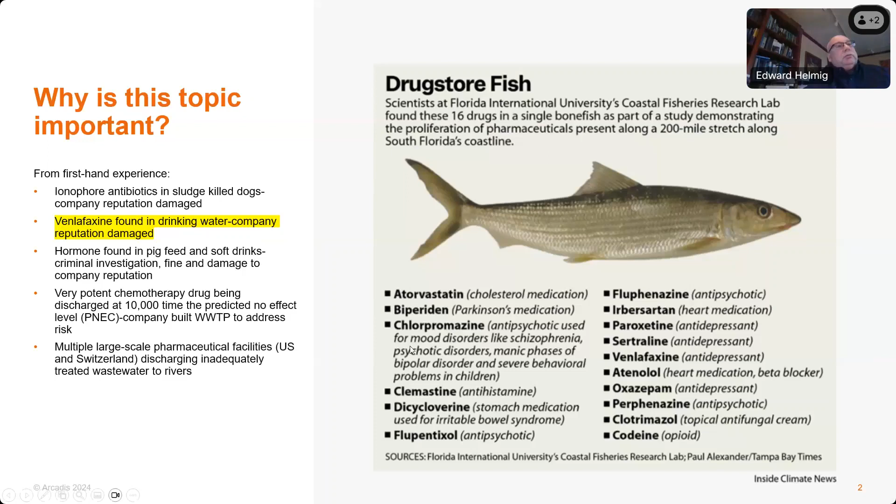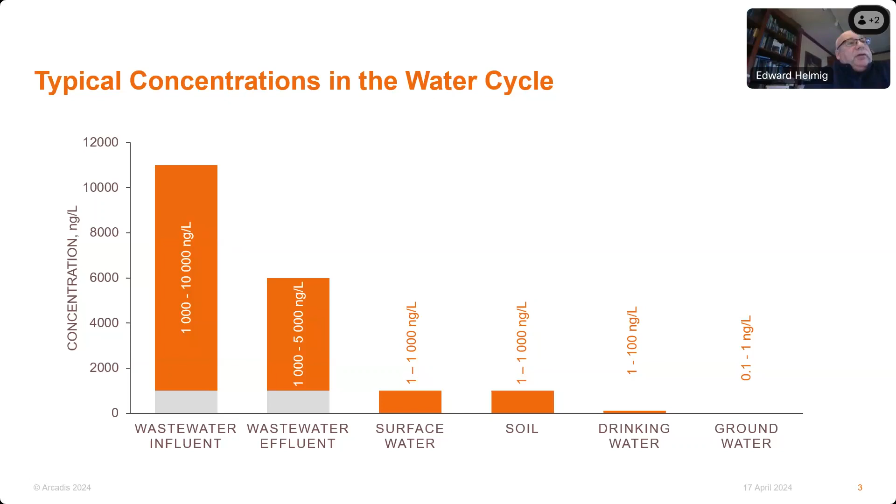So this chart is to let everybody know where this stuff is coming from. You can see wastewater influent, which rarely gets discharged directly, at least in first and many second world countries, but you can see the effluent from treatment plants. Most treatment plants are not designed nor capable of removing many of the hundreds to thousands of pharmaceutical active ingredients that are found in wastewater. Then you can see surface water, soil, drinking water, and groundwater levels by comparison. So wastewater treatment plant effluents are a big source.

You can go to the next slide. So I want to pull a common thread today, and that thread is as follows. We're going to start by talking about how do you define the scope and magnitude of your problem, the risk. And then we're going to go into what the next critical step is in a project or solving this kind of problem, which is to spend time understanding the manufacturing process.

You need to understand the waste stream characteristics and volumes. You need to learn where these waste streams are coming from, how they're generated, and how they might be segregated or treated at source, because end of pipe treatment tends to be expensive. And you need to develop a sampling strategy that's going to complement your predicted environmental concentration estimates and help you validate those numbers.

And then you're going to need to understand what you need to do to treat the APIs. That's going to have a lot to do with what's in the wastewater in terms of a molecule and the matrix that it's in, and then the technologies that are available to you and the ones that really work. And that leads to treatability, which is where we get to theory versus reality. Let me tell you, you're going to find out, as we have, that a lot of stuff that you read in the literature just doesn't work or isn't scalable.

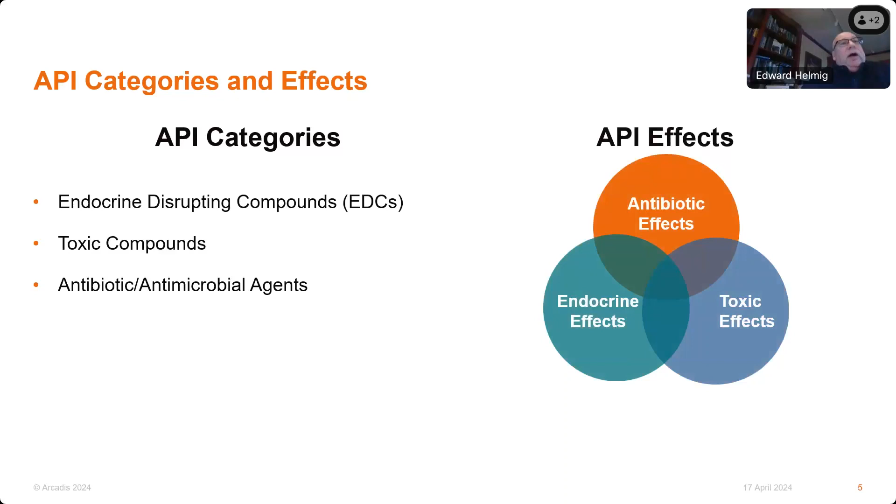Postmenopausal hormone replacement drugs, HRTs, are another subclass. Then we have toxic compounds, which will actually kill cells or exhibit a toxic effect. And then we have antibiotic and antimicrobial agents, a special class of compounds with some interesting effects that we'll talk about. So there they are in three nice little circles.

The circles overlap because compounds that have an endocrine effect can also have some toxicity. The point here is it's not just the compounds, it's measuring the effects of the APIs, the active pharmaceutical ingredients, that is equally important and can be very difficult and time consuming. Anybody who's heard of the yeast estrogen receptor assay, used to measure endocrine effects, knows it's a complicated test. We've done it and used it on projects, and if you talk to the people who developed it, it's not an easy test to do.

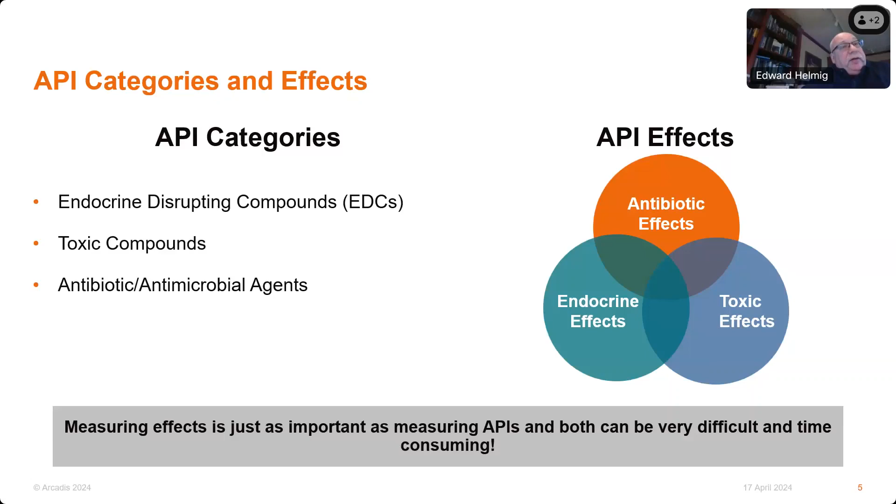Let's focus a little bit on antibiotics. These are very important drugs. All of us here have probably taken antibiotics at one time or another, and they've saved millions of lives. It's not just penicillin - penicillin was the beginning of antibiotics in the 20s and 30s, and the class of antibiotics out there now is huge. They're designed to kill certain kinds of cells, and they have a toxicity threshold, so you need to think about that when considering biological treatment.

The dose makes the poison. Antibiotics have different concentrations that will cause a problem, and that's reflected in your predicted no effect concentrations for the specific compound, and also in toxicity and inhibition studies that you would do for your biomass.

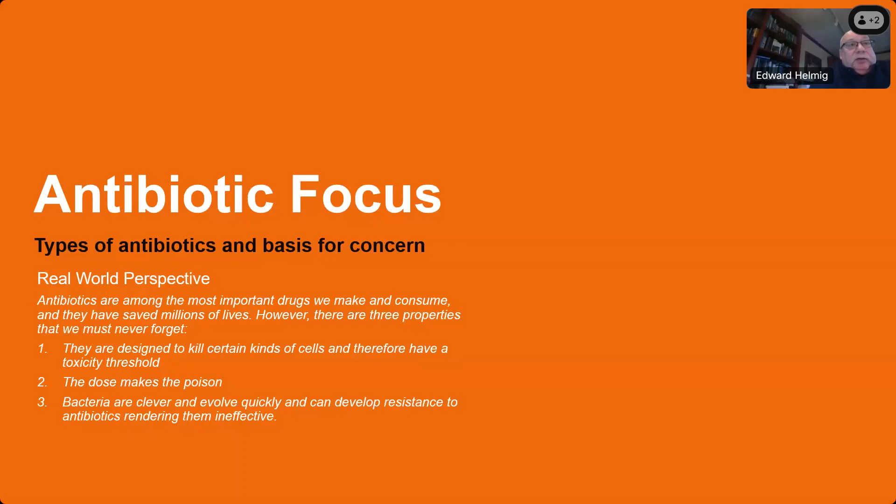Bacteria are clever - they evolve quickly and can develop resistance to antibiotics, rendering them ineffective. That's one of the things that makes antibiotics a special class of compounds, because bacteria can acquire antibiotic resistance in the environment. If those bacteria get into your body - say it's streptococcus - and you go for treatment, and they give you the preferred antibiotic for streptococcus and it doesn't work, it's because you probably have a superbug or an antibiotic resistant organism inside of you.

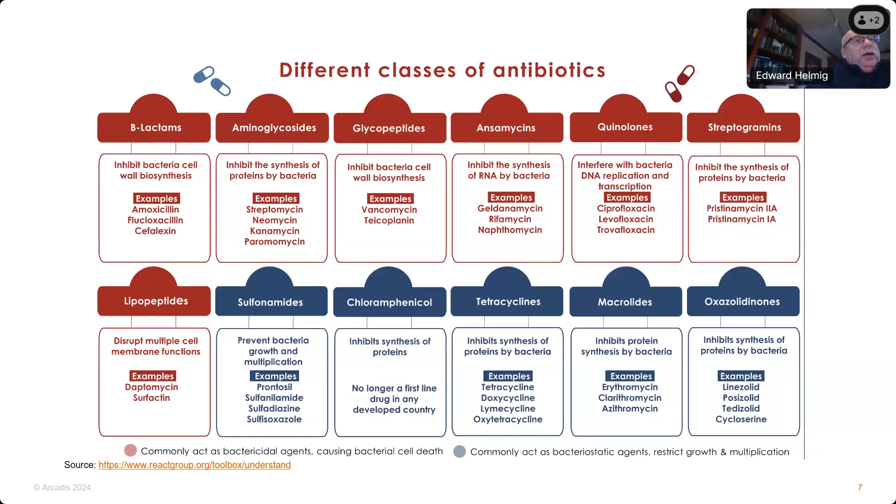As I said, this antibiotic class is huge. This is homework for you, but we've put them into nice boxes - there are 12 boxes, starting with the beta-lactam antibiotics. I think everybody's probably taken amoxicillin at one time or another. In each box we describe the antibiotic based on how it works - the beta-lactams inhibit bacterial cell wall synthesis, and then you go down through the tetracyclines, macrolides, and so on. This is homework for you to study - a very interesting area to look into.

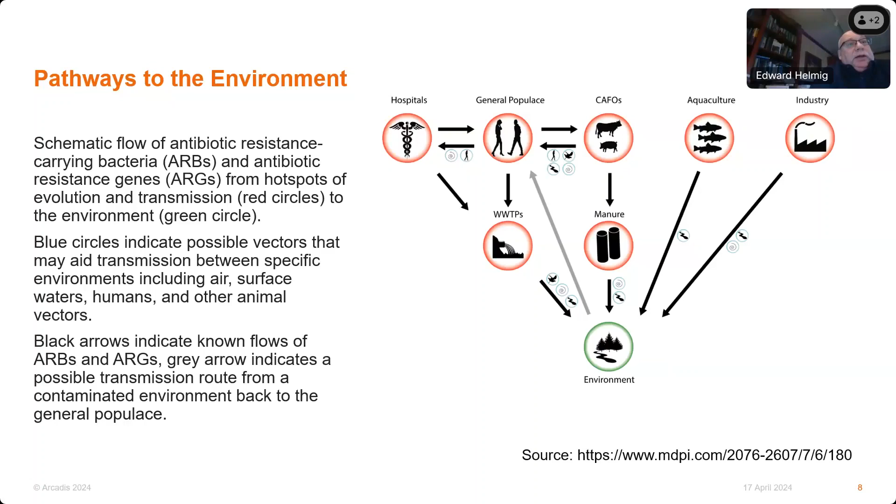Now let's talk for a minute about how antibiotic resistance occurs. Take a treatment plant for example - you have an antibiotic going to a treatment plant loaded with bacteria, and some of those bacteria are going to survive that antibiotic. So you have a selection effect.

Basically, plasmids are like cassettes that are thrown out the window when a cell dies, and other cells pick up those plasmids, and when they're under stress, they can pick those cassettes up and play them - and what they play is the information required to defeat an antibiotic, which can get passed from generation to generation. A plasmid is just a small circular strand of DNA, separate from chromosomal DNA.

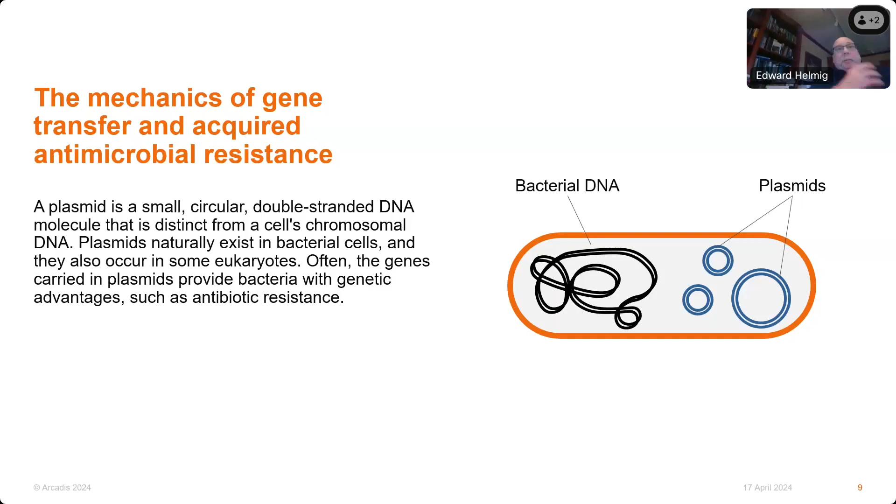So we're going to talk about estimates and measurements here. This is a tedious, high precision task. When we're talking about APIs in the environment, you're talking about 1,500 kilogram batches, where the PNEC, predicted no effect concentration, might be a tenth of a nanogram per liter. So you can be talking about 12 orders of magnitude difference. And Dave's going to talk to you about how you go about doing those estimates.

Thanks, Ed. Really, when you're embarking on these estimates, at their core they're a mass balance effort. But what you need to do is start by understanding the production process, mapping it out, understanding where things are moving throughout the process, where there are losses, and how it goes into the sewer, and what happens downstream of the production process. Understanding production schedules is critical for this, both from developing the estimate and also when you are doing sampling.

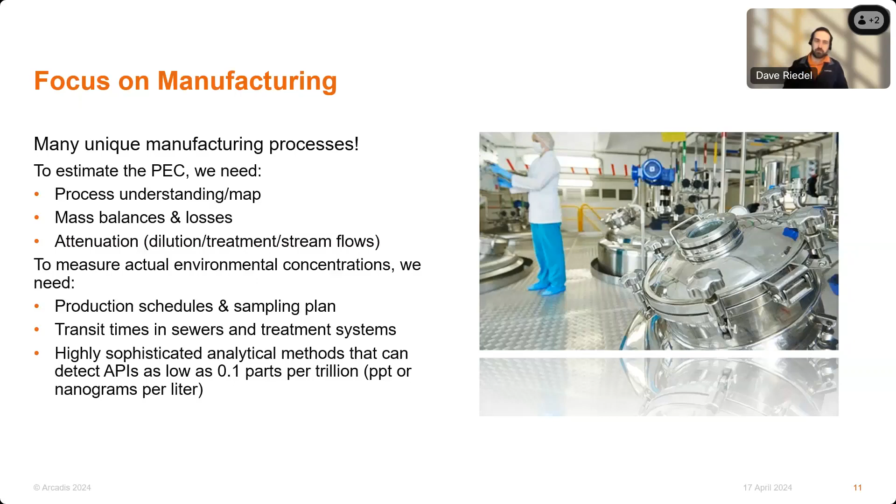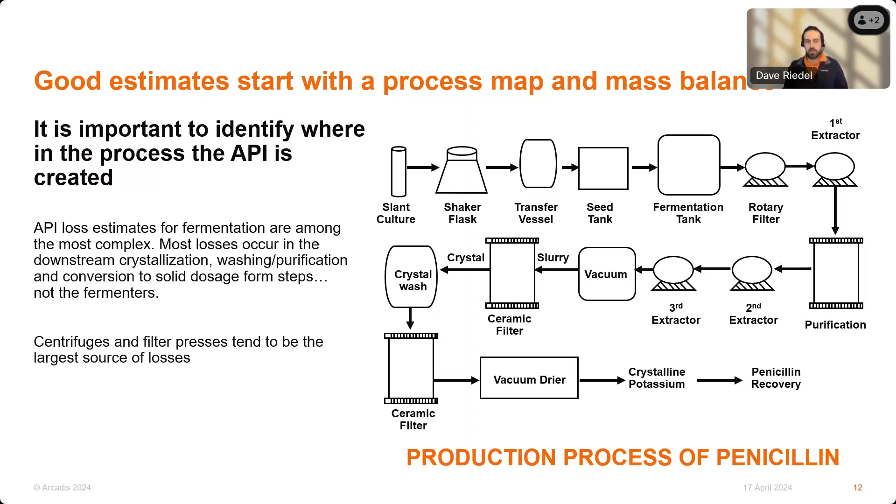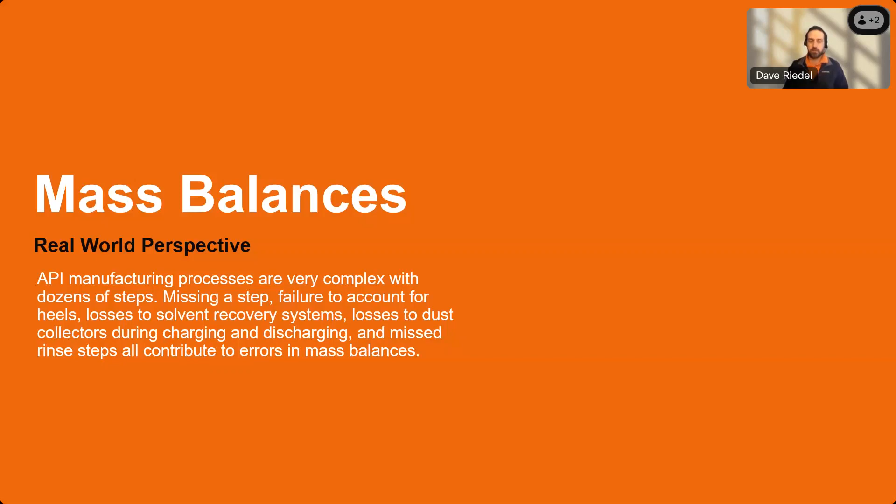That's not to say you should overlook the upstream processes, because there are events that can happen that could lead to a contribution from up there. So as I said, this is really a mass balance effort, going back to first principles, and it's really understanding the process to come up with a reasonable estimate.

Other examples may have solvent recovery systems, so that could be another source outside your immediate production area that you need to keep track of. The other thing is just understanding how they do the purification and extraction processes. They may have a trail that is out of spec that they let go to drain at the beginning or end of the process.

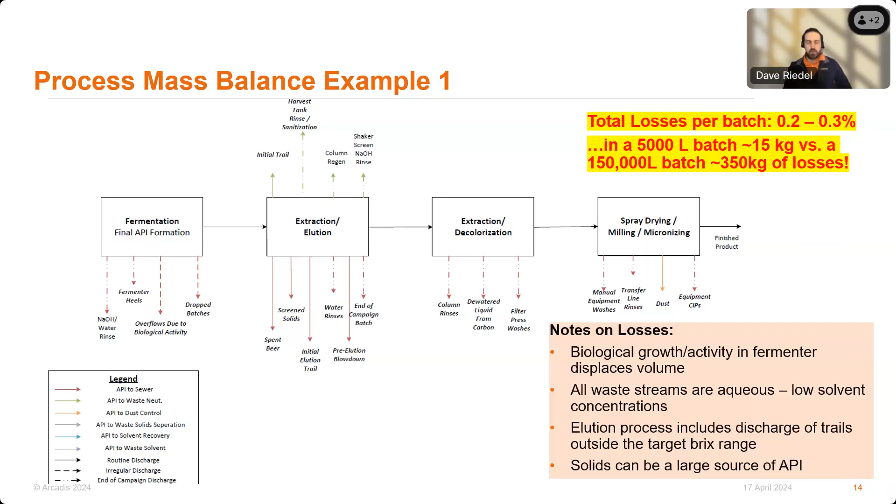Another example of a process: this one illustrates that it had a lot of other waste streams going to other locations—dust collection, solvent recovery, solvent waste disposal. All those, like I mentioned, you need to keep track of, because they could end up in the wastewater stream, depending on how they're handled.

The other thing to keep an eye on is how off-spec batches are handled. What do they do for that? Usually it's going to go to drain. That's an abnormal event that needs to be accounted for.

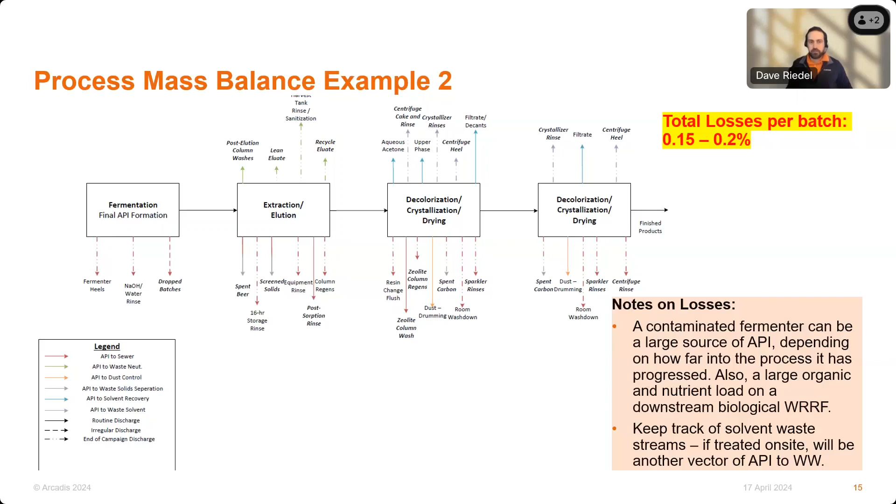And that plays into sizing of any sort of treatment systems, since it could be a huge organic and nutrient load on a treatment plant. So once you've figured it out on a process level, you expand it out to the facility to do your overall estimating of your PEC against the PNEC.

Really what you're looking at is what your production yield is, what your treatment works removal is. That's going to give you how much mass you see being discharged, from the production process to the treatment, and then out of the treatment. Once you get it coming out of the treatment, then you convert it to a concentration using the receiving water body flow or volume.

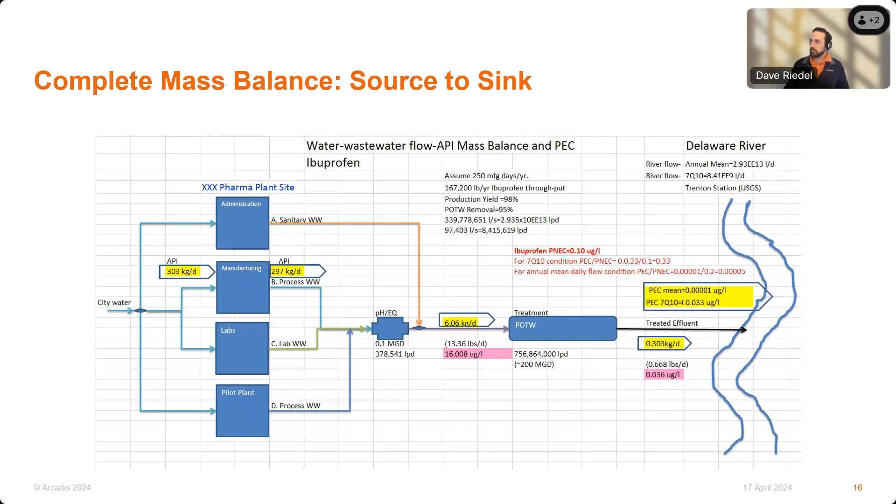There's different guidelines for which flows or volumes you utilize. Typically we see 7Q10 flows, and what you can do is sensitivity analysis to see the various impacts of what would happen if production yields changed, or treatment removal improved, or different receiving water flows or volumes were used. What you'll see is the flow or volume is probably going to be the biggest factor in this evaluation.

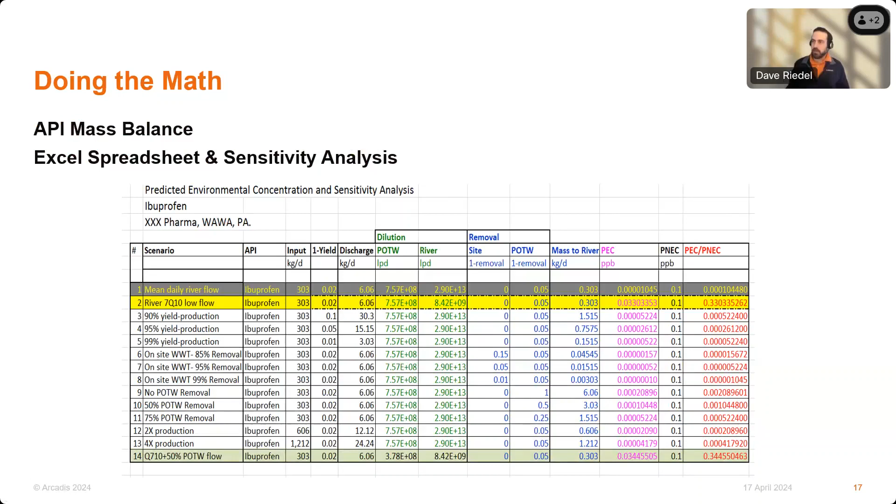So now that you've done those estimates, you may want to sample to confirm, because usually when you're estimating it's a very conservative approach. The big thing is to understand your production schedule and processes so that you are actually capturing a representative sample—ideally not just doing a grab sample and missing a major production discharge.

Really, you should be looking to capture as much of that production profile as possible. That may require setting up a composite sampler or collecting multiple samples over the course of several days to really understand the total discharge.

Analytical methods—there are several out there. The real key point is that they only cover a limited number of active ingredients, maybe 120 or more, when there's 20,000 plus in the marketplace. So big things are understanding the capability of the method, understanding the APIs you're looking for, and understanding the matrix. Those are all going to have impacts on the quality of your analysis.

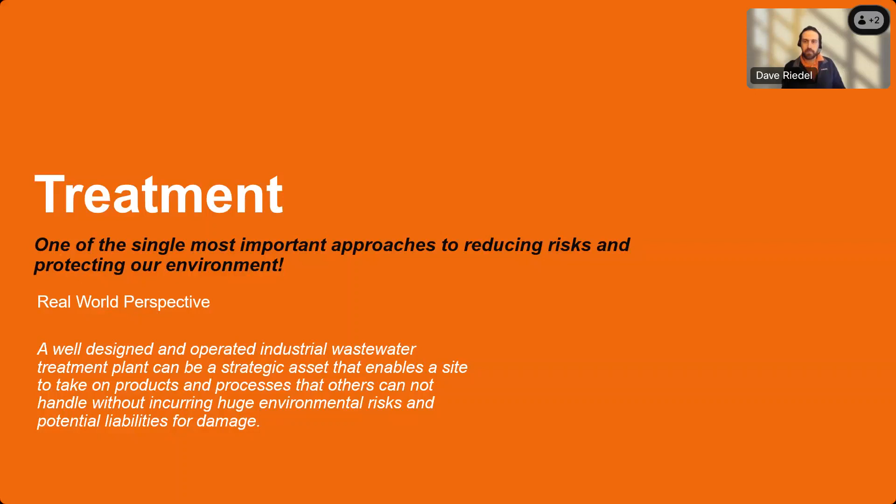Yeah, so let's talk a little bit about treatment here. This is one of the most important tools or approaches that we have to reducing risk and preventing these APIs from getting out. Most of the projects we have done have been end of pipe treatment systems. We haven't just talked about them, studied them, and designed them—we've actually built them and put them into operation.

And we've done a handful of at-source treatment systems involving ultrasound, activated carbon, ozone, and some other technologies. But keep in mind, lots of times in our business, you have to sell treatment to people. You can't make the product if you can't treat the waste stream, and you need to get people to view it as a strategic asset that will enable the site to take on new products and processes, not just an operational liability.

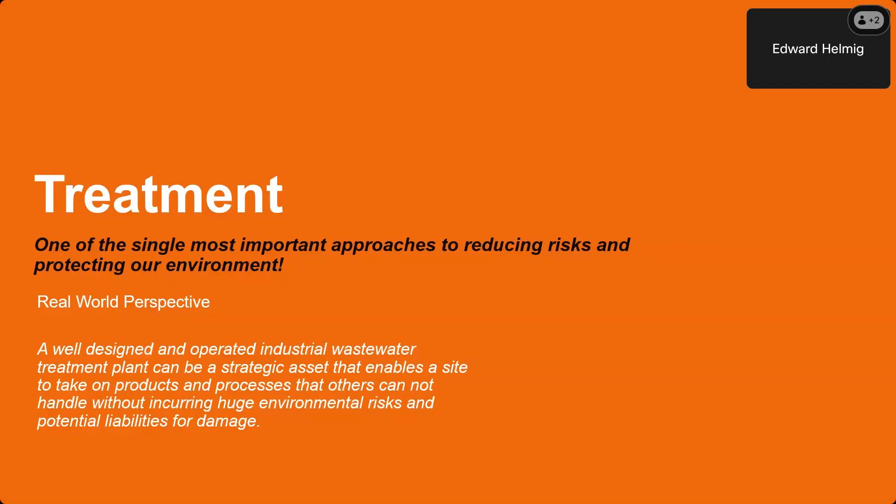So when you're thinking about treatment, in the ideal scenario, you're involved at the very beginning when the production process is being designed and built. The reality is that's usually not the case. But if you are, the ideal scenario is you're designing it to reduce the losses to wastewater, and then looking at doing the PEC and PNEC evaluation to identify the key risks.

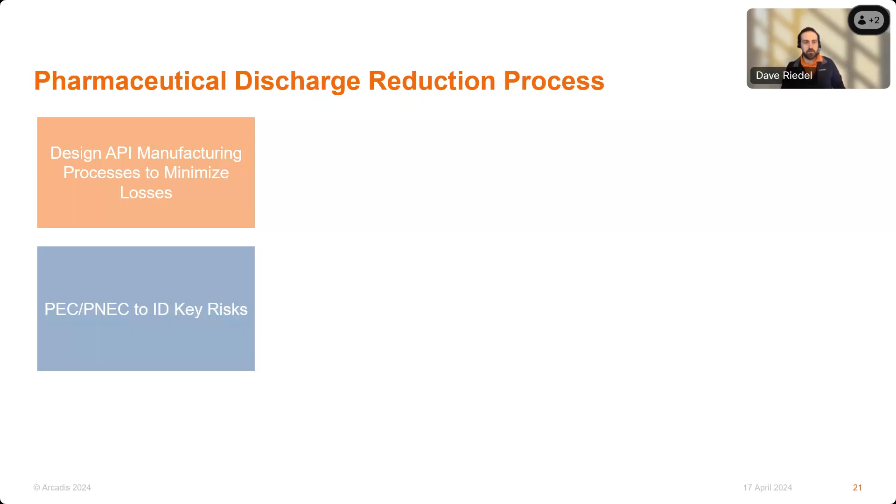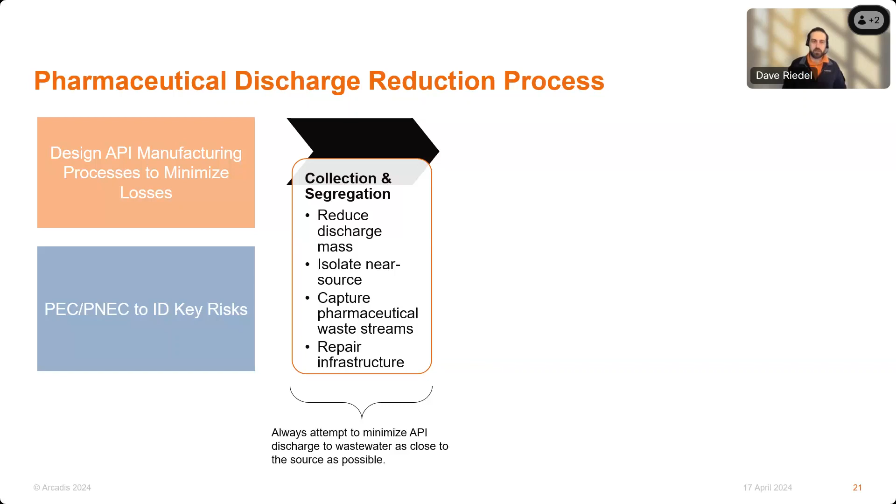But usually where we get involved is facilities already built that are looking to reduce the losses to wastewater. So the first place to look is how it's being collected and discharged into the site sewers. Are there ways to segregate at or near source and capture key waste streams for targeted treatment or disposal? Also, depending on the age of the facility, look at the overall sewer infrastructure and repair it where possible to reduce the volume of additional water you have to treat. The goal is always to minimize discharges as close to the source as possible.

Once you've gone through that exercise, then it's really understanding what is required to treat, and that's going to be probably a multiple step process because your waste stream is going to have a lot of other stuff in it that needs to be removed before you can really get at the APIs of concern. Having proper equalization, pH control, solids, oil and grease removal—those are all critical components before you get into really looking at the APIs themselves and how you're going to break those apart or concentrate them, which will happen in either chemical oxidation or sorption.

Sometimes biological treatment will do a pretty good job of it. In some cases, the best approach is really just to concentrate and incinerate. And then once you've gotten a treated effluent, evaluate the quality of it—what can be done with it. You probably produced a very high quality effluent. Are there ways to reuse it on site?

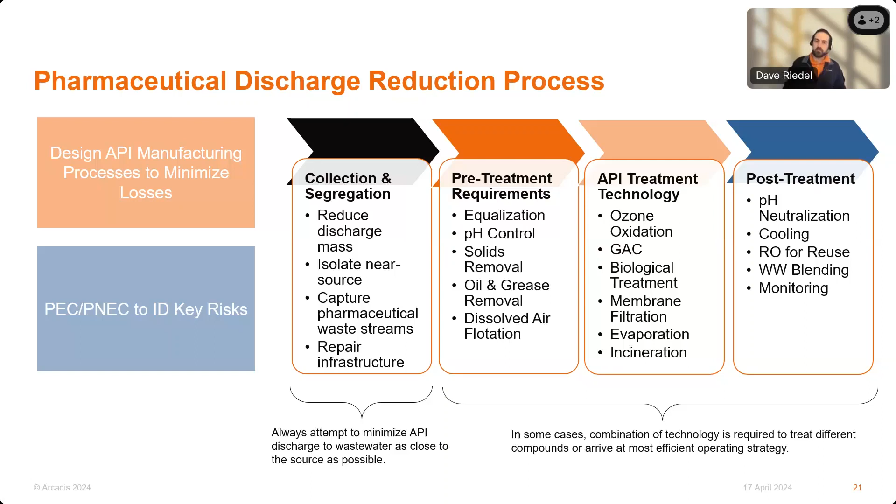Always fractionate your influent COD and understand what you have coming in, because a lot of the compounds you're interested in may be attached to particulates. If you do some simple solids-liquid separation through clarification, filtration, a dissolved air flotation system or the like, you're going to get 80+% of those compounds out, as well as taking a lot of other stuff out that will improve your downstream treatment.

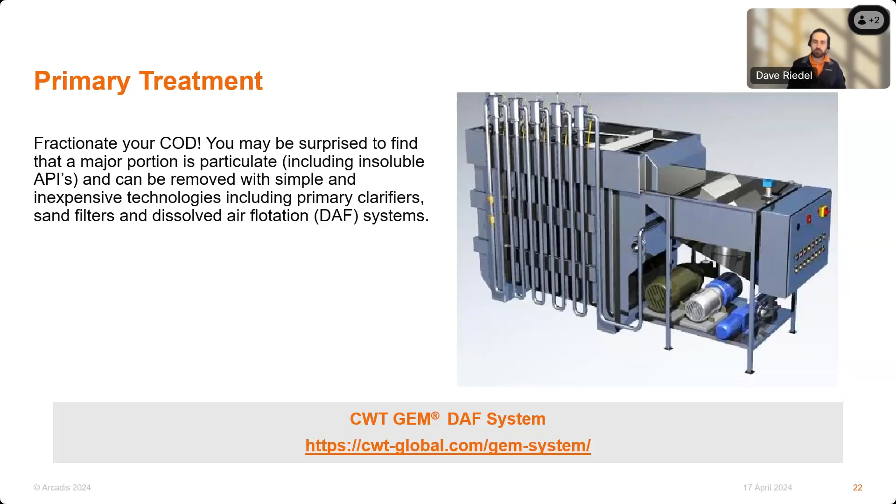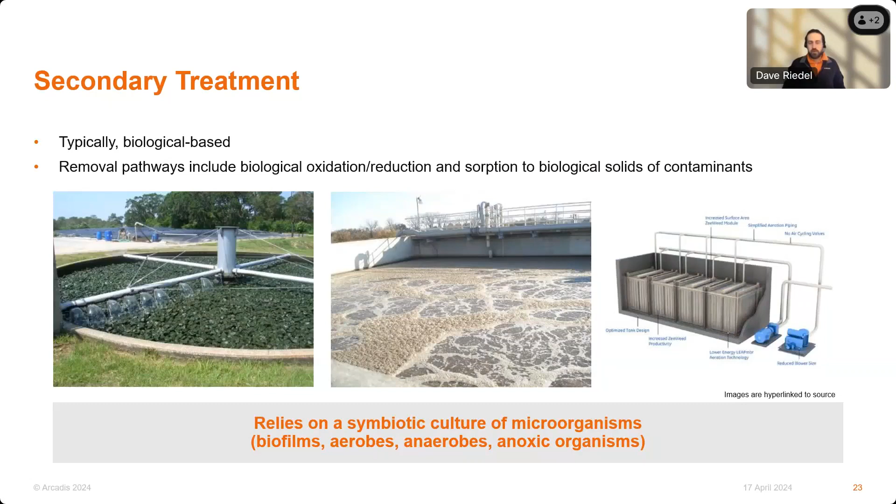More often than not, you're probably going to end up in some sort of biological based treatment system. MBRs are a very good one for this because they have a more robust biomass, higher concentration mixed liquor, and then you have the advantage of that ultra filter on the back end that produces a very clean effluent that can then be treated with a chemical oxidant or activated carbon or something else.

The thing to keep in mind is most API production is done on a batch or campaign basis, so a biomass may acclimate to that particular compound or mix of compounds. Like I mentioned earlier, you have a lot of synergistic effects that can happen. It may acclimate to that for a period, then the production changes, and now you have an unacclimated biomass again that has to acclimate to the new waste stream. So you're probably seeing this cycle repeat throughout the course of a year. It's important to understand how the biomass will respond and ensure that you have a properly sized system that gives you that resilience.

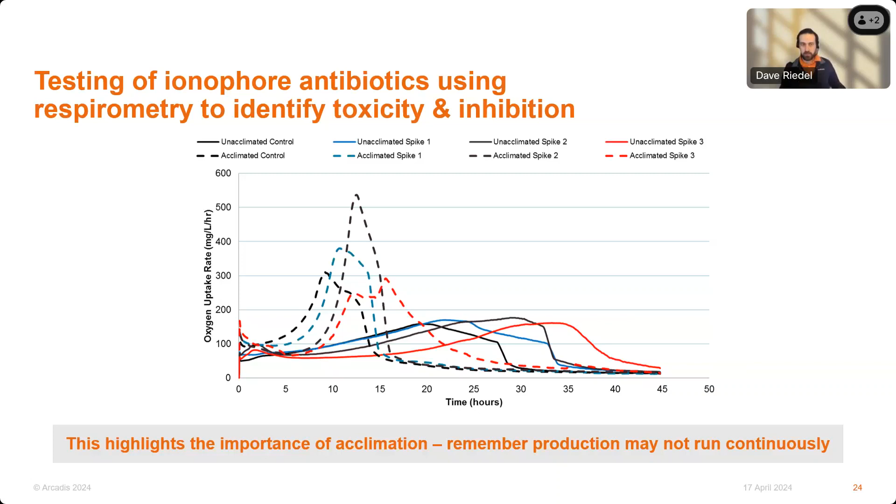As I mentioned, MBRs are a very good system for handling these sort of waste streams. They're robust, they give a long sludge age that really helps with the biological degradation of some compounds, and the effluent quality is very high.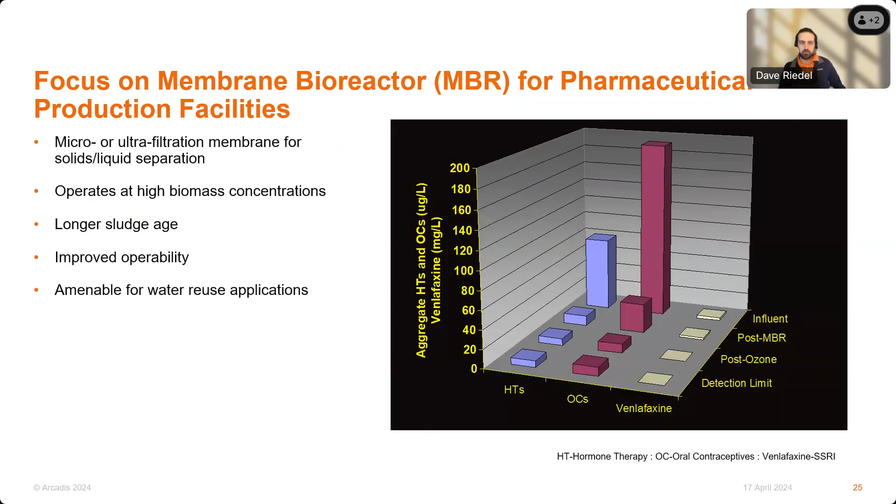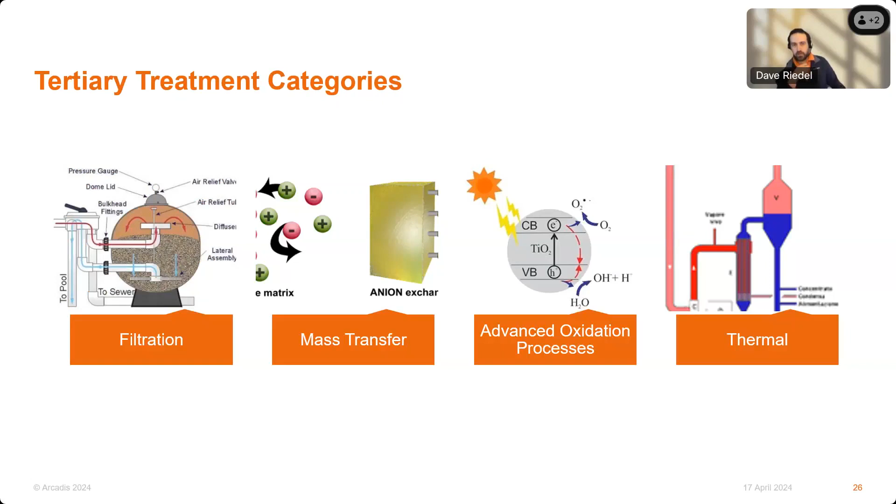Once you've gotten through the primary and secondary treatment, then you're looking at tertiary to really get the last APIs out, get down to your target. That could be additional filtration, some forms of mass transfer, ion exchange, or activated carbon, depending on the compounds you're dealing with. More often than not, you're probably going to be dealing with some sort of oxidation, and depending on the waste, you may be dealing with a thermal system. Usually those are going to be on a smaller volume though.

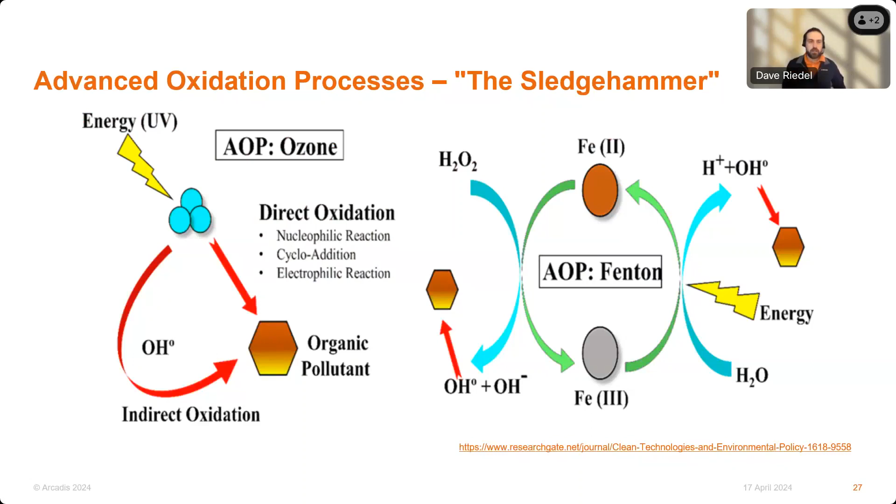Oxidation is really kind of a sledgehammer. It's going to either directly or indirectly oxidize the compounds. So really understanding the chemical structure of each compound you're looking at is critical, to understand how it may be impacted by oxidation or by activated carbon or anything like that. There is always value in doing bench and pilot testing to confirm though.

This is just a quick summary of how each technology handles APIs, what the general capital range would be, and some of the operating considerations associated with each tertiary process. The bottom line here is that each one has its pluses and minuses. It's really going to be subject to the waste stream, the compounds you're dealing with, and site specific factors.

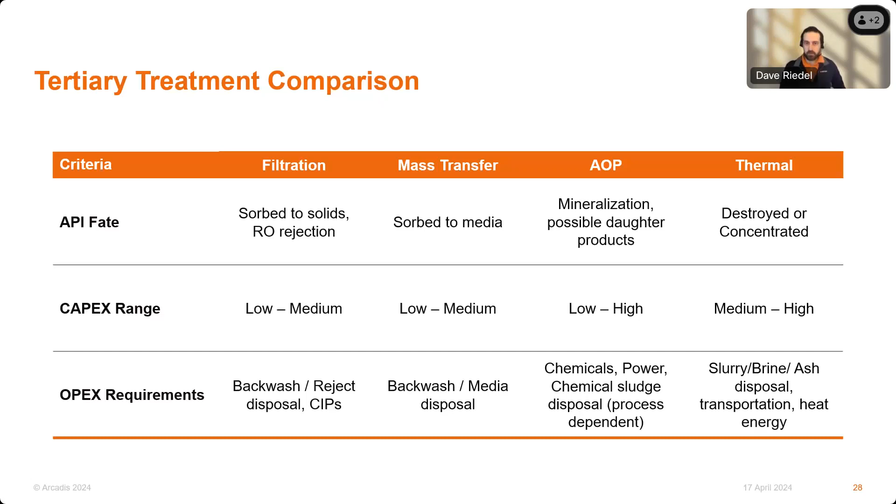Okay, yeah, this next slide is a very busy slide. I'm going to try to put it in a nutshell as quickly as possible for you. This is arguably one of the more important slides in the deck, and probably the most important project of my career. So remember in the beginning, I talked about the potential to have hormones and

selective serotonin reuptake inhibitors in your beer. Well, this is the treatment plant that resolved that issue and made that risk disappear. This was started in 2001 with the discovery that there was an issue and huge risk at the plant site with PEC to PNEC calculations. It involved analytical method development, technology screening, bench and pilot scale testing, engineering design, equipment procurement, construction, commissioning, and then full scale

performance verification. I was involved in this project. I was the owner at the time at Wyeth, and I was involved in this project from the very inception until the very end when we turned it over to the plant, and we had not only demonstrated unequivocally that this worked, it actually worked better than we had ever imagined.

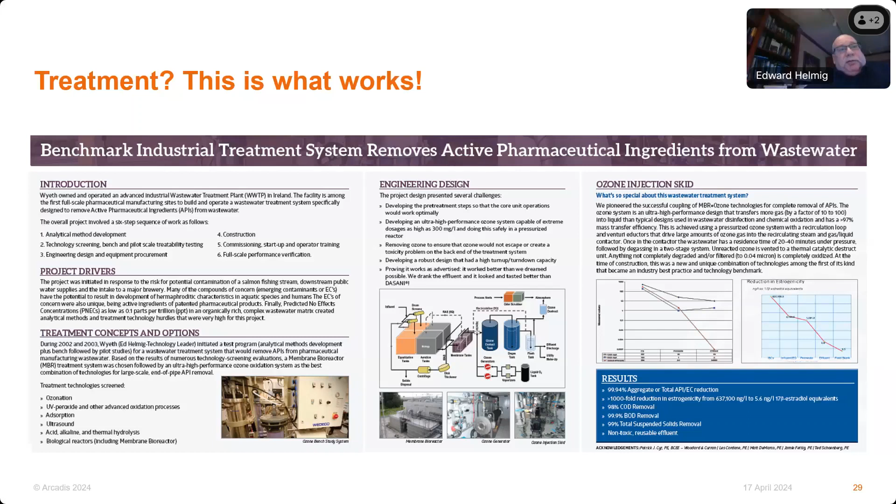98% COD removal, 99.9% BOD removal, 99% TSS removal, a non-toxic reusable effluent that was not only drinkable, but we reused half of it as makeup water in cooling towers. So when you know what you're doing and you do it right, this is what you can achieve.

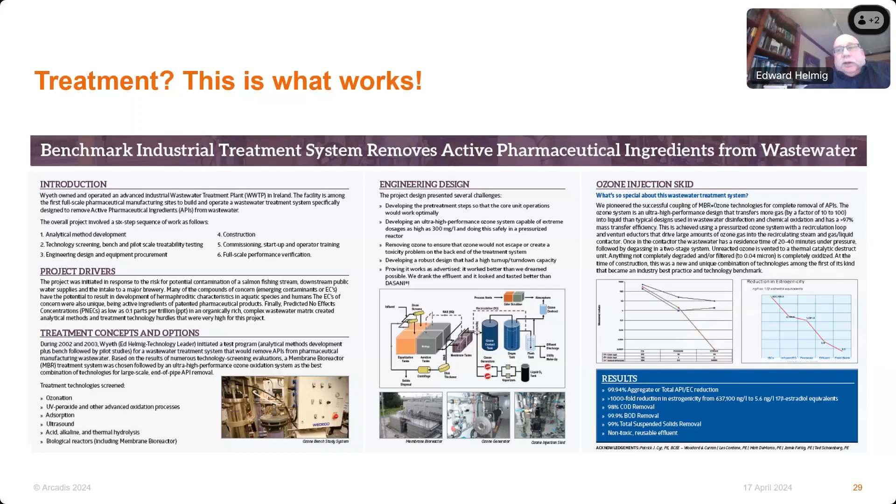Go to the next slide. There's a paper on that project, by the way, that's written and published at WEF. So let's pull it all together.

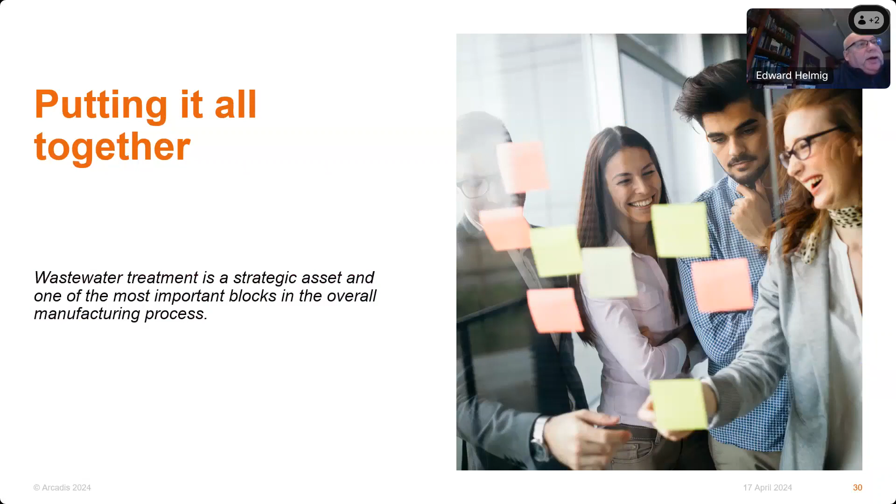Again, a treatment plant's a strategic asset. You can see the one we just presented as a huge strategic asset for that site, and it's still operating. So we've talked about how to define the magnitude and scope of your problem, understand the API's risk - that's the PEC and PNEC calculations - and understand the manufacturing process. You have to spend, depending on the size of the factory, a lot of time at the plant understanding what they're doing.

Dave talked about the air emissions, the scrubber, the losses due to dust collectors. Those were scrubbers at the one plant we went to, and so the dust was going right back into the wastewater. Treatability is critically important, especially if you're going to try newer novel technologies, which I wouldn't recommend if you're going to go to full scale. Try to stick with stuff that's been proven.